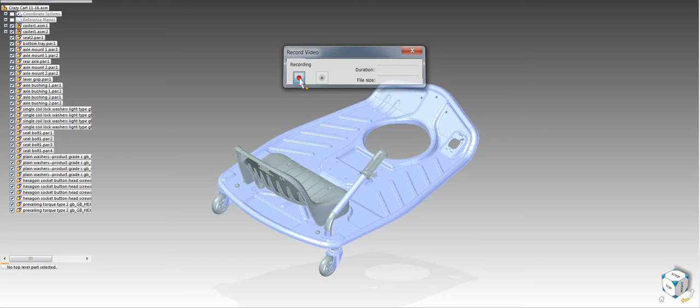Okay, I had a request on how I made changes to the bottom plate to make it longer. So I'm going to show you why I did it and then how I did it. The first is the why.

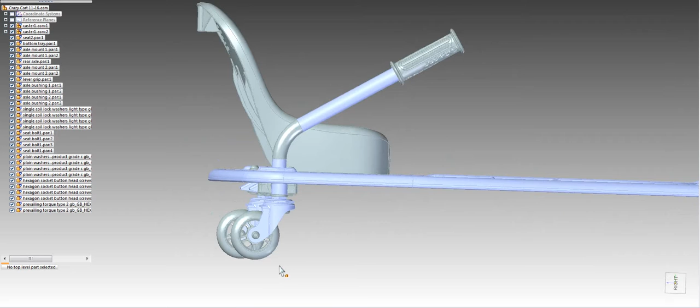What I wanted to do with my design was to lower it. And to lower it, I needed to either make these wheels shorter or move them up. They're already pretty small, so I decided I would simply move them up.

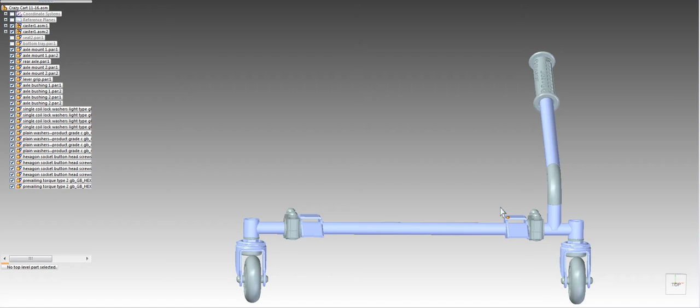So I'm going to hide the seat and the bottom tray. I'm going to get rid of these bolts just to make things easier or less cluttered. So I'm going to activate this. Go to face priority.

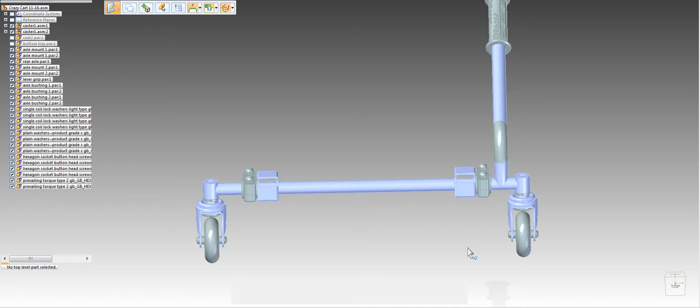What that'll do is I'll choose all the geometry that's on the bottom. I want to flip that around 180 degrees because it's going to be on top of the bottom tray. So just sticking it on there, turn it around 180 degrees.

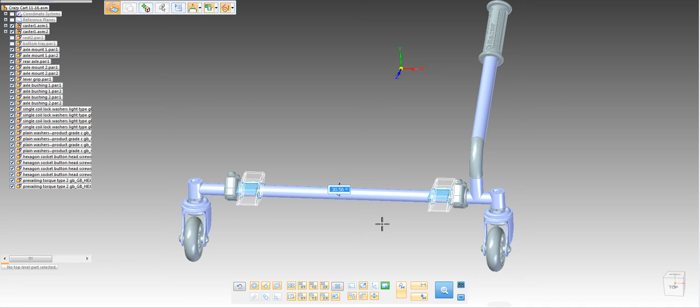I'll give it a second. Oh dear, I hope it didn't lock up again. Okay, 180 degrees. So that moves these so that now would mount on top.

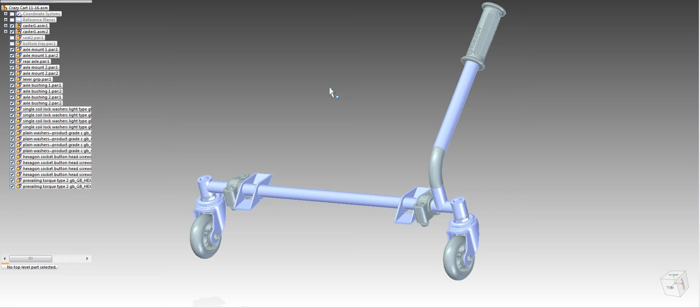Just going to turn live rules off. It's just kind of slowing me down right now. A lot of the geometry is really complex, so it can spend a lot of time trying to figure out all the relations.

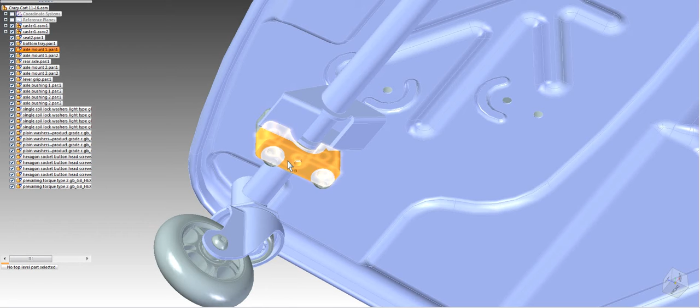So now we'll go to part select. I want to activate this so I can reference off of it, and activate this so I can reference off it. Probably already active. Oh well.

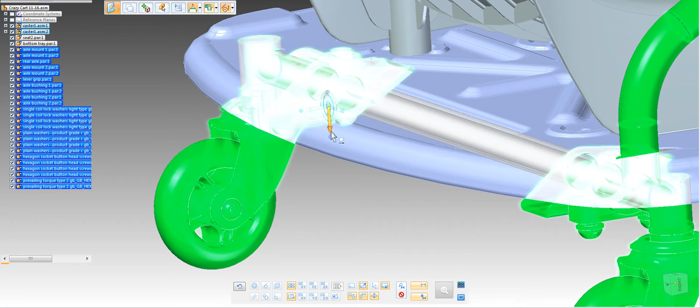So I'll move the steering wheel to the face that I just barely made sure was active. Move it up. Match up to that bolt. So now you can see that I've effectively lowered everything by putting that on the top.

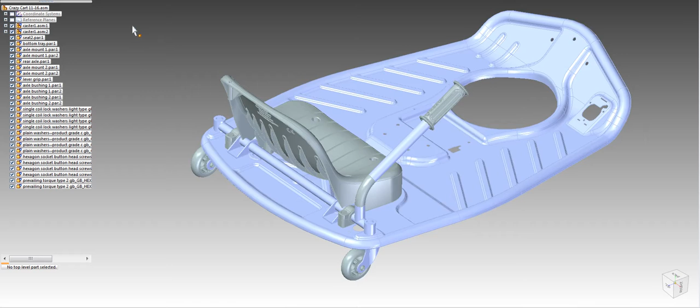But now the axle interferes with the seat, so I'm going to have to move everything back. So I'm going to pick all that again, minus the seat. I want to move it back about 2¼ inches.

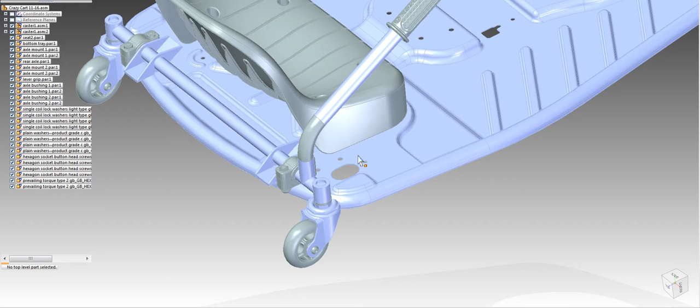And I can't quite do the same thing with the bottom tray just because there's a lot of these faces that are pretty complex. So save it as it is right now. And then open up the bottom tray.

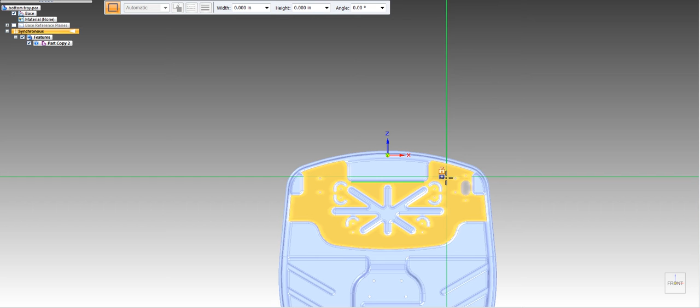So like I said, this geometry right here just really confuses or makes it really hard for the synchronous technology. So we're going to just cut it out.

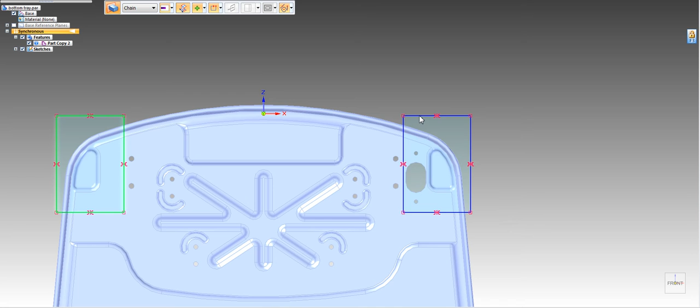I'm just going to get a rectangle in there. Select the rectangle. Mirror it across that axis right there. Extrude. Get some chains. Cut.

Oh, that's weird. Oh, silly me. I forgot to make this the... Gotta make this the active design body so that I can cut away from it.

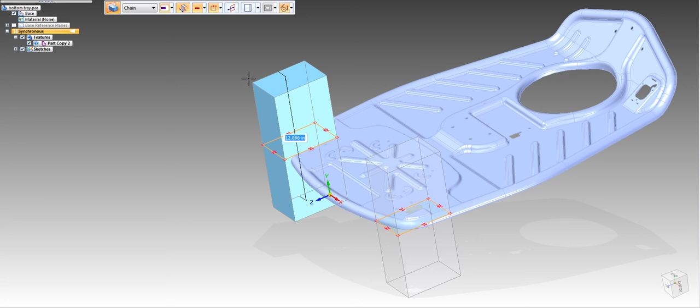And it didn't activate. Come on. There. Body's activated. Now choose those. And now it's cutting it away.

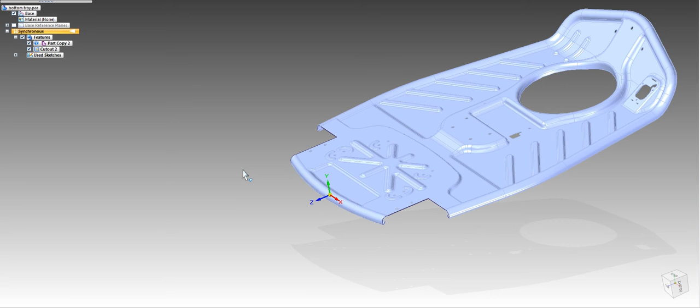So with the complex geometry out of the way, I can now just lengthen it out pretty easily. So I want those, and these are the holes that mount up to the axle mounts. So I want to move them as well.

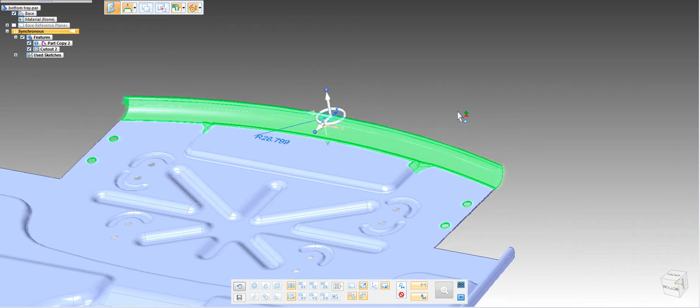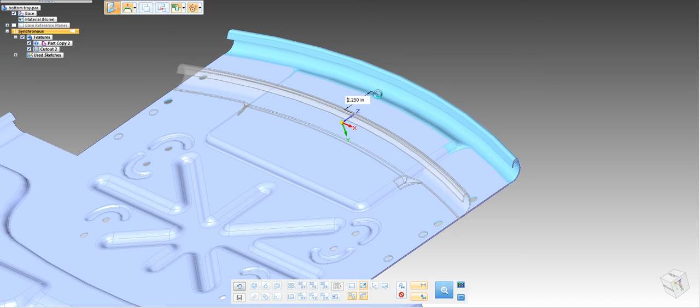Again, I've taken off live rules because this is a complex part and it brings my computer to its knees. So it'll start doing the calculations. Once I can move it, I will move it out 2.25. Just like that. I'll save it.

And then go back to my crazy cart. And now you can see it no longer interferes with the back of the seat. So now what we need to do is just fill in that gap.

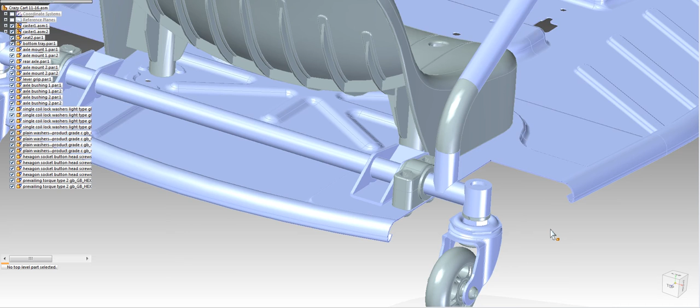You can use a loft to go in there. Make a sketch with that geometry. Make a sketch on this surface for that geometry. Create a loft. Create a hole.

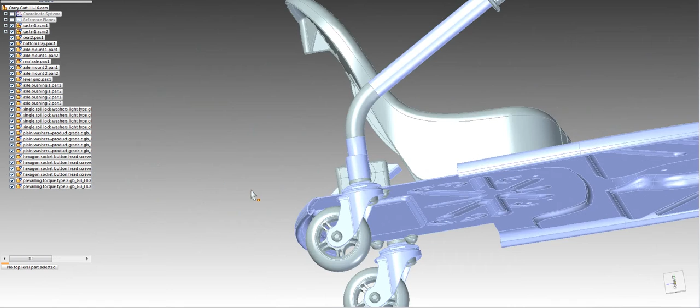Fill it or fill in the spot between your loft and such. Create a hole for your new thing there. I think I went back a little further because I wanted to completely cover the wheel, but that's basically how I made it longer.

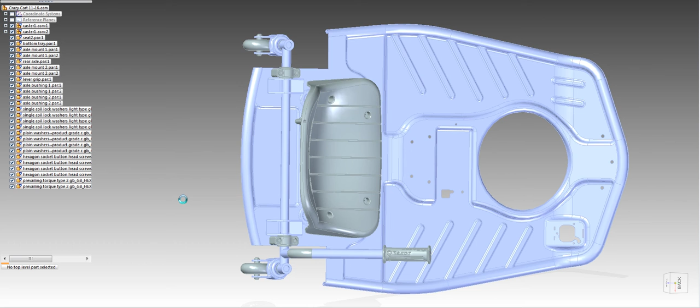So I can go in here and do face select and just get what isn't... get everything else. Let's see. Yeah. And then I should... never mind. Picked up that face. I didn't want that. Anyways, you get the idea.

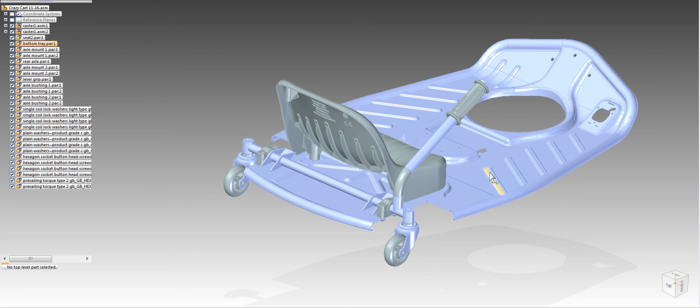That's how I made it longer. On the simpler parts, I was able to take advantage of synchronous technology. I wish I could have used it on this. There's a lot of really complex surfaces and such. But just with a little tweaking, you come up with a very editable model. Hope that helps out.